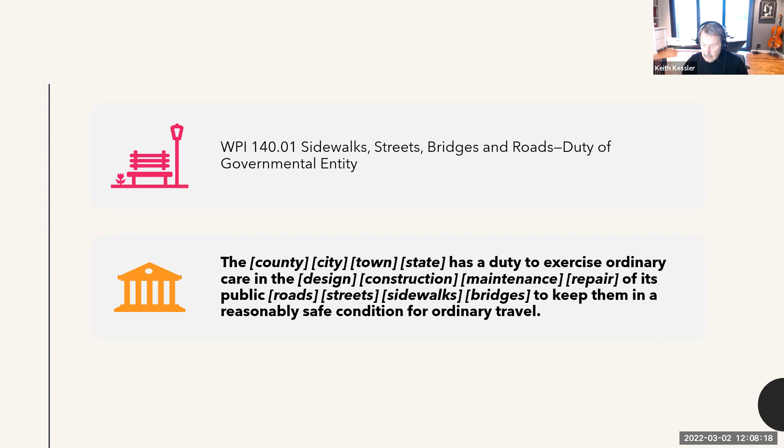Brian was the plaintiff attorney in that case, and we ended up with a remarkable result from the Supreme Court, where the court said, essentially, if the plaintiff is able to establish an unsafe condition, the burden shifts to the defense to show what they did to make the roadway reasonably safe, which is usually zero, which is why the injury occurred in the first place. And that takes us to what Ray was showing a moment ago, which is 140.01.01. This is, in fact, Owen versus Burlington Northern.

The duty includes a duty to take reasonable steps to remove or correct hazardous conditions that make the bridge unsafe for ordinary travel, including hazardous conditions that may exist along the road, bridge, and so on. The point being that once you establish that the roadway is unsafe, the burden shifts to the defense to show what they did to repair it. And note that it says it may exist along the road. That's not just the street itself. As we'll discuss shortly, the Wuthrich case holding addresses sight obstructions created by hazardous vegetation at an approach to an intersection. So it's not a matter of just the roadway.

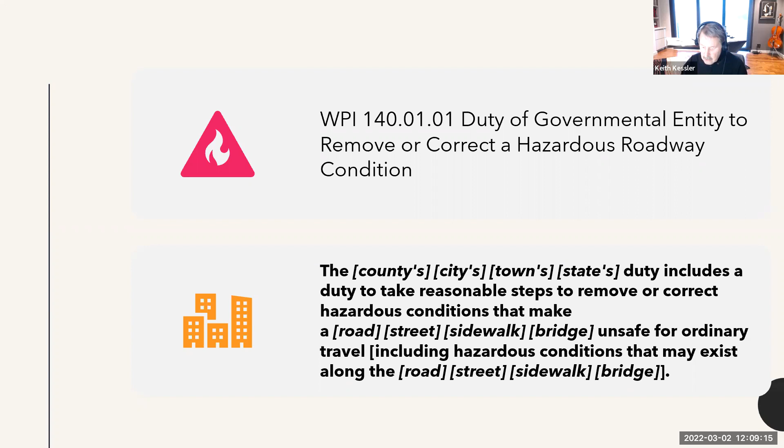WPI 140.02 talks about a different situation. This is in conditions under which the governmental entity was not actually responsible, that is to say, did not create the condition in the first place, whether through creation of a roadway condition or a curve in the road or lack of signing. It's a matter of snow and ice, essentially. And these cases are very, very difficult, in part because there's a requirement that the state, county, or city have notice of the condition and have a reasonable opportunity to correct the condition in order to be held liable, and that's very, very difficult.

It seems as though in the state of Washington that should not be an issue because we have a preventive maintenance program at the state DOT level. There are ways of determining whether or not a roadway is going to be freezing, whether there's going to be the deposition of black ice on the roadway surface, and anti-icers such as calcium chloride are always available to address that issue in advance of a condition having come into existence. Ray, I don't know if you're going to be talking about that, or if you have, but the bottom line is snow and ice cases are very, very difficult in our state.

We are just really behind the power curve there. The last section of the WPI I wanted to talk about is 140.03. And this says a person using a public road has a right to proceed on the assumption that it's safe for travel until he knows or should, in the exercise of ordinary care, know to the contrary. Meaning that there's an assumption that the state or county or city has done its job in providing a reasonably safe road. And that presumption is something that we can use in cases where there's an allegation of contributory fault.

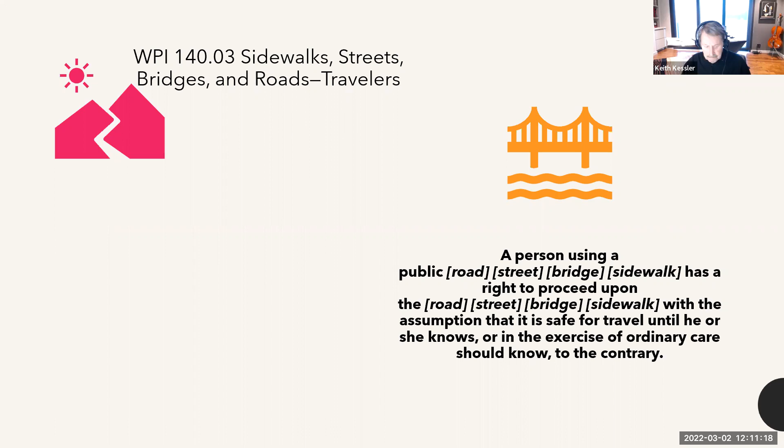And that is, I think, the areas of law that affect us in these highway cases, both highway design and maintenance. Okay, so now we're going to move on and talk about the first road design and maintenance issue, which is clear zones. And the basic idea with regard to clear zones is that the roadside is part of the road. The idea is to have a forgiving roadside where the drivers can recover if they lose control or go off the road for whatever reason. The idea is that they should have an opportunity to recover and not hit a pole or tree or flip over because of a steep slope.

On a highway, on a 55, 60 mile an hour highway, typically the clear zone width is about 30 feet. On lower speed, lower volume roads, it's generally 10 feet. But in some situations, because of space constraints, it's not possible to have that design clear zone. So if there are fixed objects in the clear zone, such as trees or utility poles or overpass supports, the standard is that they're supposed to be removed, or if they can't be removed, then mitigated, such as by shielding them with guardrail or some other type of barrier, so that if there are errant vehicles that leave the roadway, they don't strike those objects.

And it's a standard part of road design to do a clear zone analysis, to look at objects that are within the clear zone and to document them and to document what can be done to address those if necessary. And then the first example of a clear zone case here is a utility pole that was close to a highway. This is SR 105 in Grayland in Grays Harbor County. And the Public Utility District had done a project in this area where they had moved other utility poles outside of the 10-foot clear zone, but for whatever reason, this pole was not moved, and this collision resulted in the death of the driver. And there are specific standards and regulations for the placement of utility poles, and I'm not going to go into detail on that. We just wanted to discuss the basic clear zone concept.

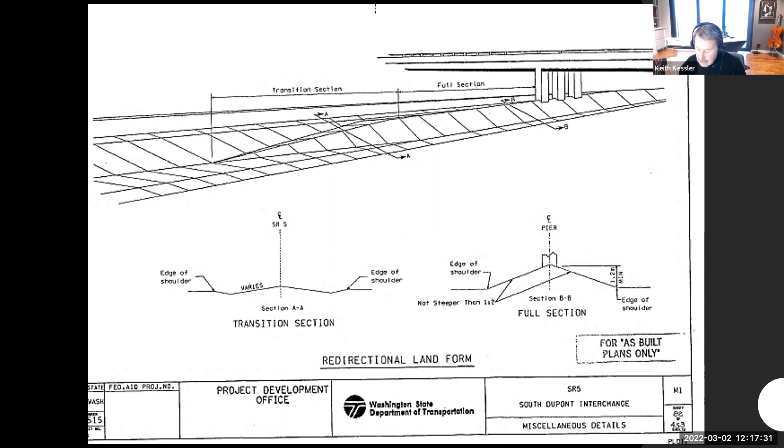It's just compacted dirt, and back in 1973, some official with the State Department of Transportation decided that it would be, quote, aesthetically pleasing, close quote, and would, quote, gracefully divert an errant vehicle, close quote, rather than having the ugly guardrails that rust. So they installed 198 of these across the state of Washington to attempt to protect vehicles from striking overpass bridge pillars.

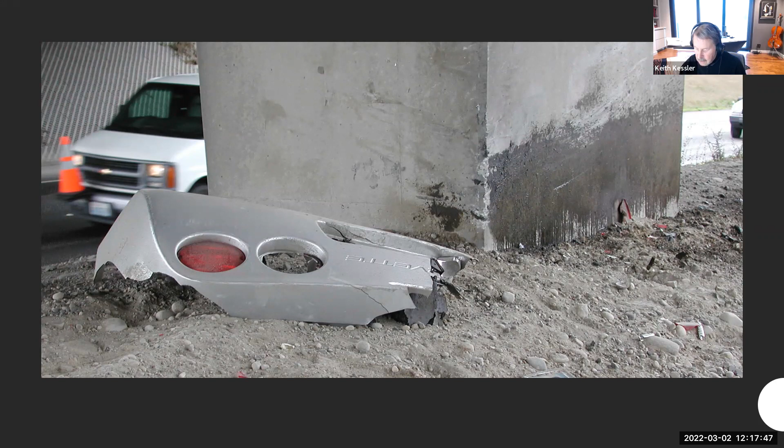This here was this case. This is April of 2003. A car's rear tires lost traction on the wet roadway surface of State Route 522. This is the overpass for SR 202. It loses traction, slides into the grassy median, crashes into the overpass pillar, and the gas tank ruptures and the vehicle explodes into a ball of fire. They've done the jaws of life here, but at the time, the passenger was trapped in the car, and the car burned.

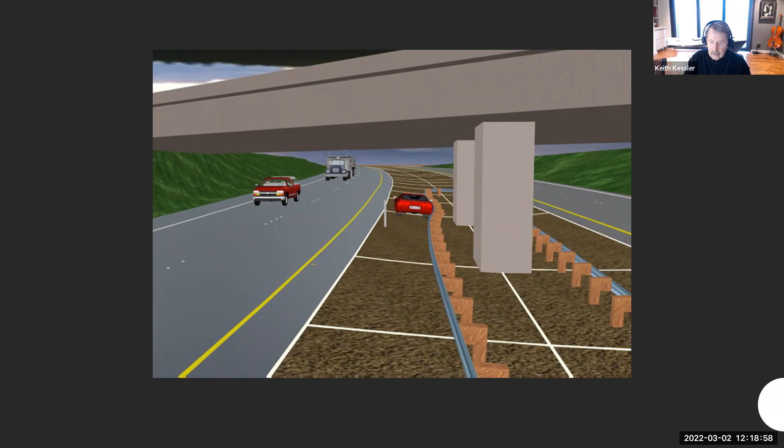What was interesting, according to the State Patrol, they said that this earth berm served as a ramp directly into the support pillar. The argument in that case was, of course, that a guardrail would have returned at an angle of 8 degrees to 10 degrees. It would have returned the car to a 4 to 5 degree exit angle, resulting in no disabling injuries. Unfortunately, that was not done, and the passenger burned to death.

Another case, interestingly enough, that was back in 2003. In 2006, we are addressing a similar situation. This is the Center Drive Freeway overpass in DuPont. It's constructed in 1997. Once again, it's supposed to be guardrails or some sort of protection, but they've got the earth berm instead. And so at this point, we've had the fatality we just discussed. There's a triple fatality at Smoky Point. There is testing at the Texas Transportation Institute that shows that repeatedly this earth berm fails to redirect vehicles, and as a result is inadequate and unsafe.

So to its credit, the state legislature decided that they better do something about it, and they provided for a 6-year plan of funding to eliminate these earth berms and place instead guardrail or concrete barrier to protect vehicles from making contact with it.

However, October of 2013, a 16-year-old driver heads south on I-5 toward the Center Drive overpass. She attempts to change lanes to the right. There's a vehicle in the right lane. So she responds by overcorrecting, turning sharply to the left. Her vehicle slides across and into the grassy center median, into the overpass pillar. And again, it's only the earth berm. She ends up, as a result of the crash, quadriplegic.

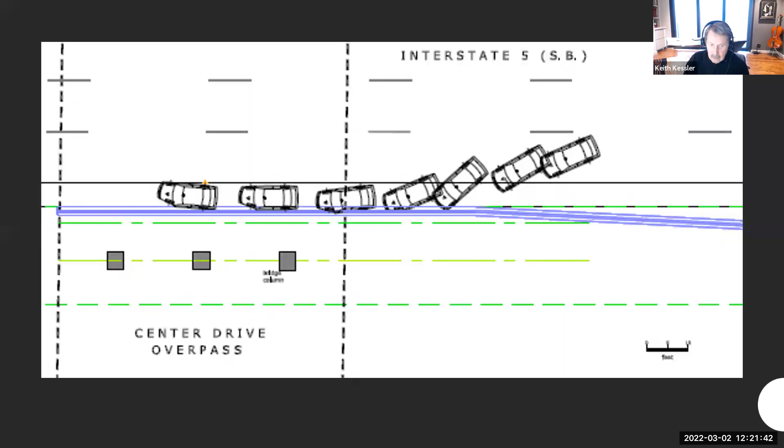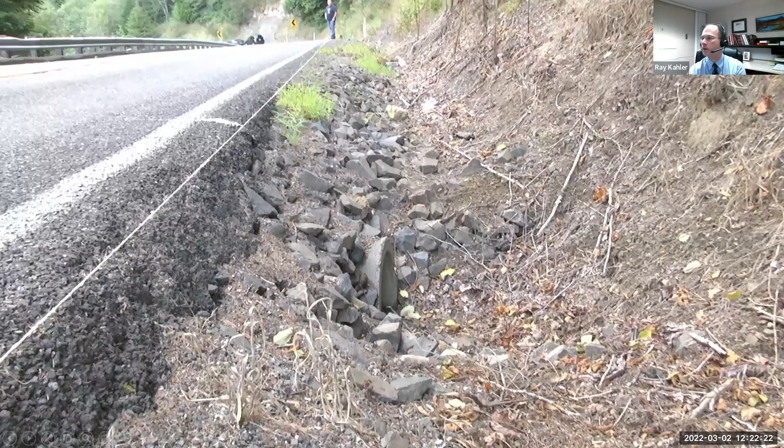This is a view of the culvert. And then this gives you some perspective on how deep and steep of a slope this is. There isn't sufficient room here to flatten the slope because there's a steep incline, a mountain hill right next to the road. But there are options for addressing culverts and ditches like this.

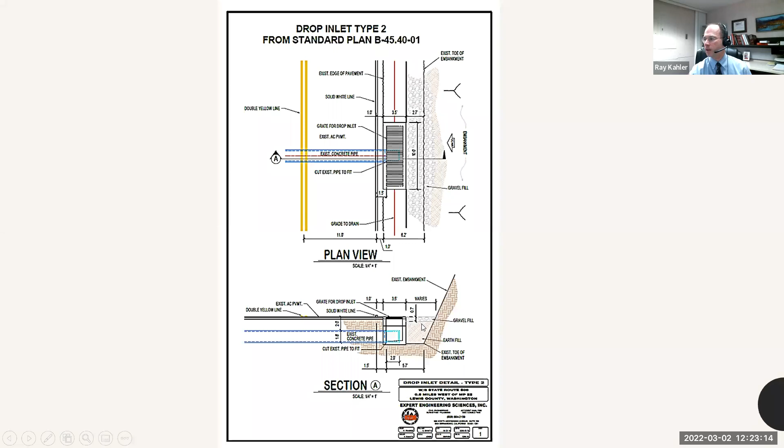This is an example of what's called a drop inlet, which is in the state DOT design manual. It involves putting a grate over the culvert. You can see the culvert pipe here, and it calls for putting a grate in and then filling the rest of the ditch so that it's a level shoulder area rather than a steep drop-off. And this is just an example of a grate that's used in that type of condition.

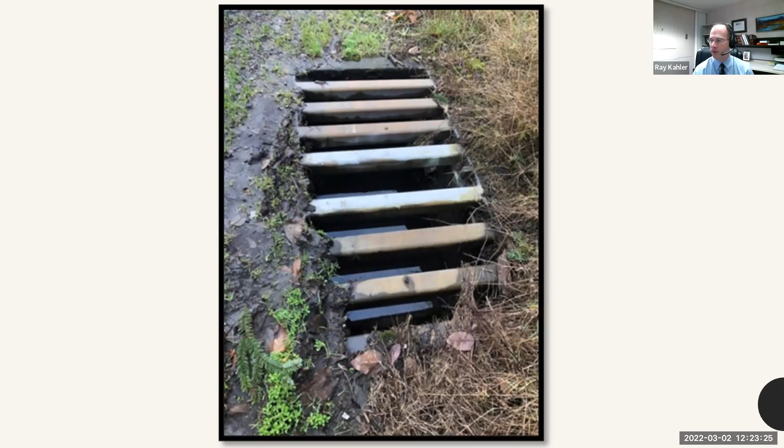Did you want to say anything before we go on to median barriers, Keith? Well, there was a question about the case that held that the duty to provide a safe road exists regardless of the negligence of others. Keller versus City of Spokane is the primary case in that regard. That's the key case there. And it's in our materials, by the way. I think we've got about 34 pages of analysis of those cases.

So median barriers. It's an issue to consider in any crossover collision case. It could be Jersey barrier, guardrail, cable barrier. There's also some barrier curb options that we'll talk about, which might be effective depending on the prevailing speeds. There's no hard and fast rule for when a barrier is required, and it's largely a function of crash history. Caltrans, California Department of Transportation, does have a warrant that's often used by other transportation authorities as a reference point.

As Keith said, typically in road design cases, you don't have to prove notice of an unsafe condition. There's case law saying that the government is not entitled to a free bite. But this median barrier situation is kind of an exception to that, where you might have to prove a history of crashes in order to support a claim that a barrier should have been installed. And now Keith is going to discuss a case involving a crossover collision and median barrier.

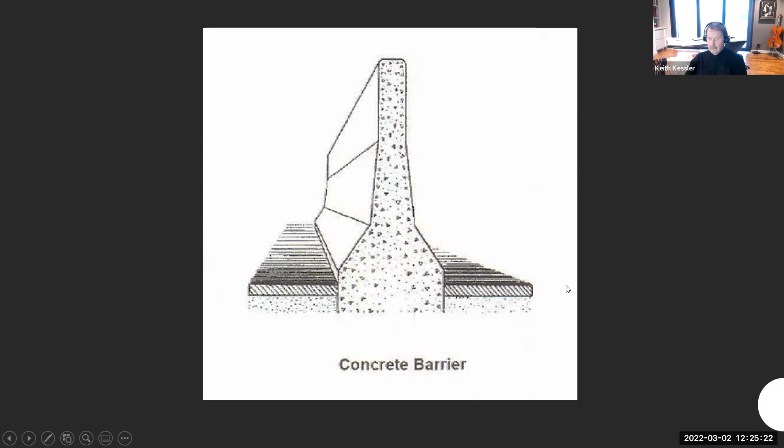Sure. We had talked about Interstate 5 with that overpass pillar. This is 522, and this is 23 miles in length. All but 3 miles of this highway have this concrete Jersey barrier that you can see in this photo here. But for some reason, and it's primarily political, because these are two different legislative districts, funding may be requested for one and not for the other. In any event, WSDOT clearly saw the need to prevent crossover collisions, but left 3 miles of the highway without any Jersey barrier.

As a result, the highway itself was referred to even before this as a highway of death. This is in a WSDOT memo. They've referred to it as a highway of death, based on the community's complaints. On this occasion, Stanley's driving southbound on SR 522. His wife Joan is his passenger. The defendant driver is approaching from the opposite direction, heading northbound. It's 3 o'clock in the afternoon.

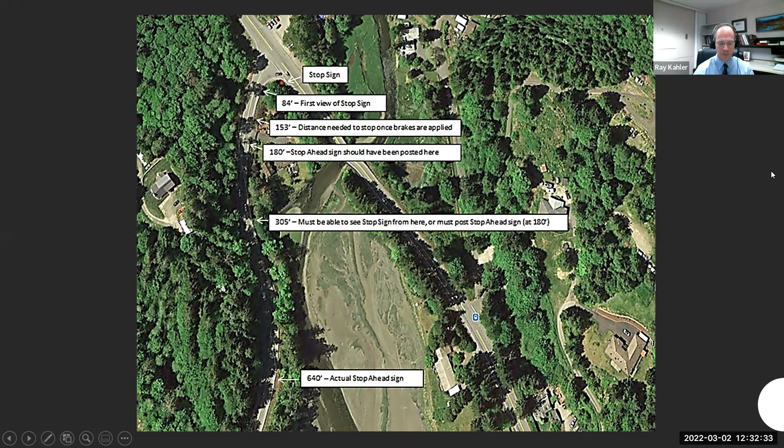And the concern was, of course, that you forget about the stop ahead sign because things have happened since. I think it was like 11 or 12 seconds over that period of time.

Yeah, and one other thing to point out on that case, it involves an intersection of a county and state road. And there's a statute that addresses responsibility between the state and cities for state highways that are part of a city road system. There's agreements between the city and county authorities in the state, but you need to look carefully at those kind of situations. You may need to file suit against both entities in those cases. And let them fight it out.

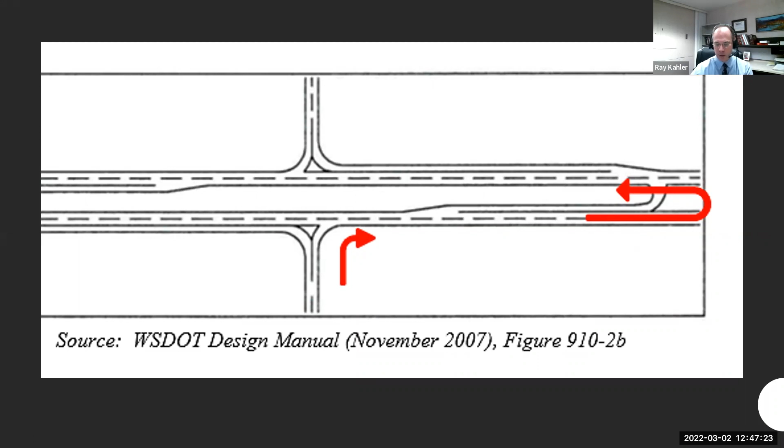This is an example of the J-turn that was installed at that intersection.

This is another example of what the state was talking about in the case I just discussed. This is SR 500 in Vancouver, a high-speed east-west highway connecting I-5 and I-205. It has very high traffic volumes during the morning commute, and traffic signals had been removed at a couple of intersections on SR 500, but two still had traffic signals, and this is one of them.

When the light was red, traffic would back up over half a mile to the east. There was an advanced warning flashing light on a sign alerting drivers that the signal was red and they needed to stop, but traffic would back up well beyond where drivers could see that flashing warning sign. As a result, drivers traveling 60 to 65 miles an hour would suddenly encounter a long line of stopped cars and be unable to stop in time.

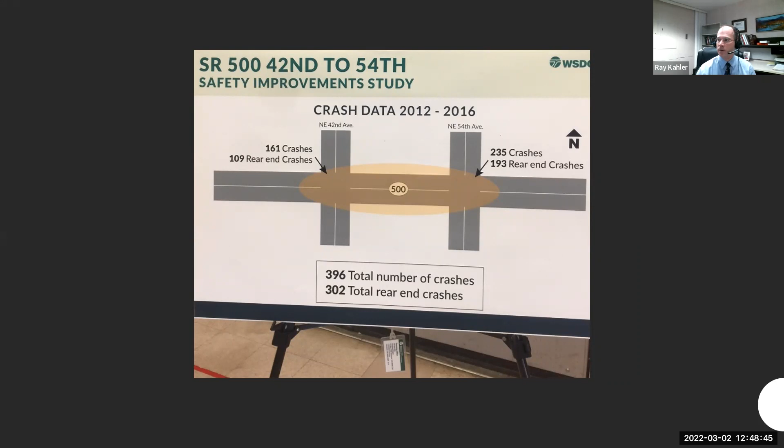The result was that over 75% of the crashes occurring at these two intersections were rear-end crashes. So what was done here was to close the intersection and use what's called a right-in, right-out design. Drivers would have to turn right to exit or enter the road, then travel to an intersection further down to make a U-turn for a crossing or turning maneuver. This project was done over the course of a weekend.

Let's talk about channelization as an alternative to a traffic signal. This intersection of SR 12 and Maple Street in Burbank, Washington, is a primary route for parents, students, and teachers to access 3 schools on Maple Street. State Route 12 is a 55-mile-per-hour 2-lane highway. The hazard here is that drivers intending to turn left onto Maple Street are often forced to come to a dead stop on the highway because there's no left turn lane at the intersection.

So one April morning, Jerry, age 16, is driving to school. He stopped on the highway at the intersection, waiting to turn left onto Maple Street. A defendant driver approaches from behind Jerry's pickup and suddenly realizes he's stopped, hits his brakes, swerves to the right, knocks Jerry's pickup to the left and into oncoming traffic, where Jerry is hit head on and dies a week later.

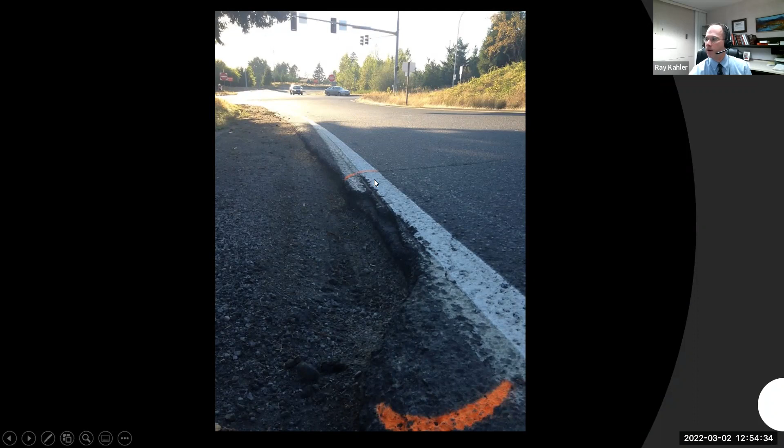Our client was on a motorcycle going on a ride with some friends. One of the friends got stopped at this light back here, so he was going to pull off onto the shoulder to wait for the friend to join them. When he pulled off onto the shoulder, he encountered this over 6-inch deep drop-off and lost control of his motorcycle and crashed.

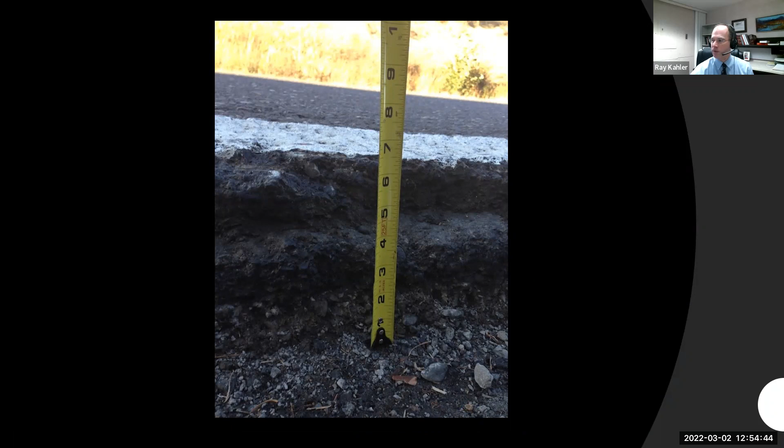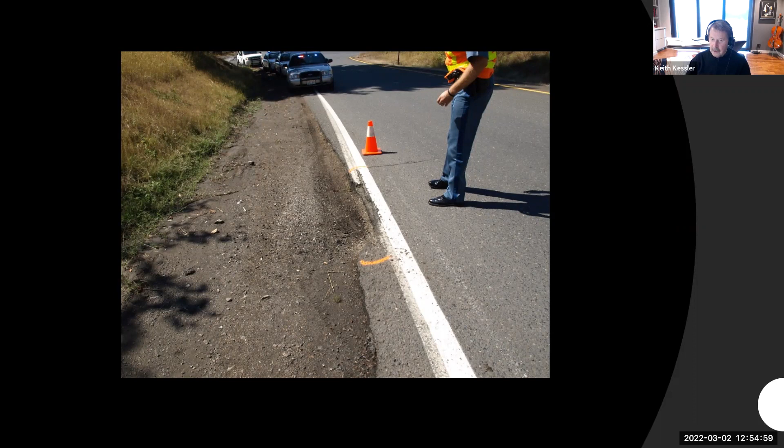It's evident that the state DOT knew what the problem was because they had striped around the drop-off. Notice the fresh white paint for the pavement edge, the fog stripe. And that last mark is an indication of where the motorcycle tire rim hit the drop-off.

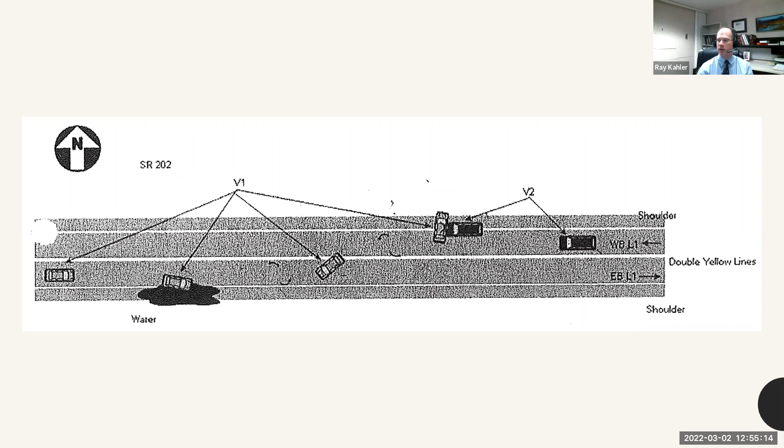The last case Keith is going to talk about is a roadside maintenance case. Plaintiffs are driving eastbound on SR 202 near Redmond. Their right front tire encounters standing water on the roadway and it hydroplanes. The vehicle spins counterclockwise and into the path of an oncoming vehicle.

The cause of the standing water and the hydroplaning was the failure to maintain brush, vegetation that was coming up from the roadway edge. Had it been cleared as required for roadside maintenance, the water would have dropped down into the ditch and there would not have been standing water there.

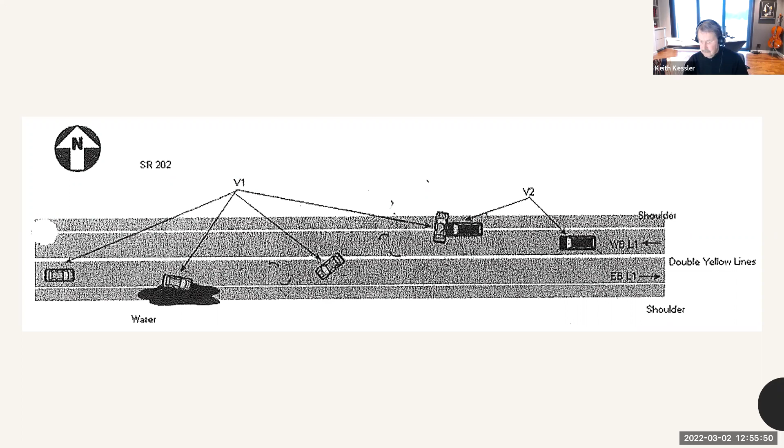Okay, and then we have one more example of a road maintenance case. This is the Chehalis River Bridge in Aberdeen. The bolts that anchored one of the light poles on the bridge had rusted, and in high winds, the light pole crashed onto someone's windshield.

All bridges are supposed to be inspected on an annual basis, and there's a checklist form for doing a bridge inspection. Part of that inspection includes looking at the light pole condition.

And it looks like there might be a question, and I think that's probably where we're going to need to stop for today, and we may have to come back and talk about bicycles and motorcycles and pedestrians.

Was there another question, right there? Cassie? Brian Smith asks: if notice is not required after establishing that the roadway was dangerous, what evidentiary fight should we anticipate in motions in limine regarding notice evidence? Is that something that is always beneficial to the plaintiff? I'm finding in a road design case I have that there are plenty of crashes at the subject intersection, but they are not necessarily that helpful because they're not terribly similar in terms of how similar they are to my crash.

Well, similarity does play a role, for sure. Just rereading the question again. No, notice, there doesn't have to be notice of a problem. It's always beneficial to say that they knew about it or should have known about it, but it's not critical. You'll find that in the ordinary course of inspecting roadways, with regular inspections undertaken, there's not an excuse for missing something they should know about. But notice is not required to establish that a roadway is dangerous, other than in snow and ice cases.